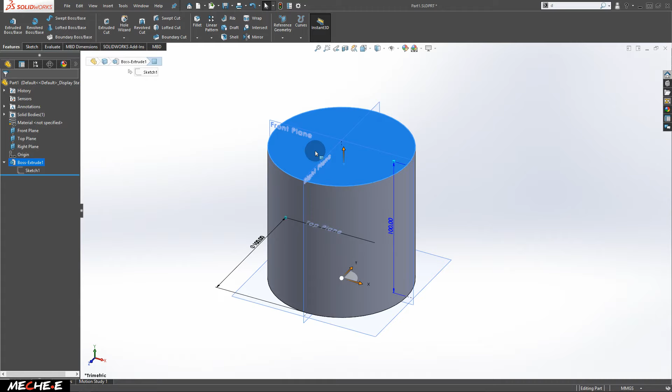To do that, right-click on the surface, select Normal To. Now with this surface selected, highlighted in blue color, head to the Sketch tab and select the Sketch button to enter the sketch mode, and you'll see a Sketch2 is created.

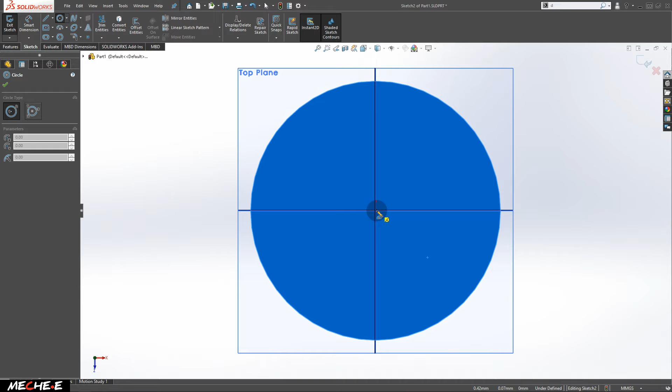Now draw another circle from the center point and give a dimension to it. Let's say 80.

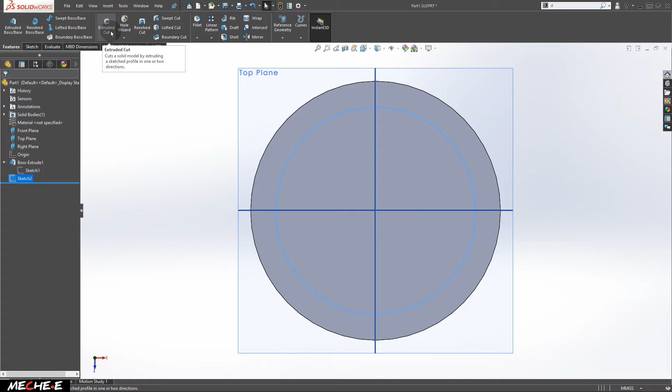After that, exit the sketch mode and go to Features. With the Sketch2 selected, press the Extruded Cut option right here. Now you can see there's a yellow line showing a preview of where it will cut through.

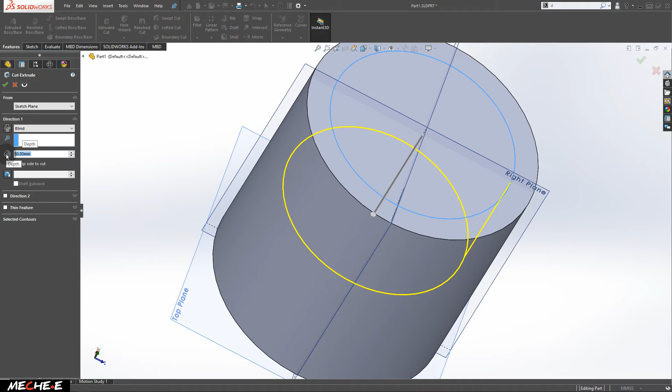To set the depth of the cut, you can key in a value here, or simply drag this arrow. When you're satisfied, press the tick sign. Now you can see this is cut into half, not all the way through.

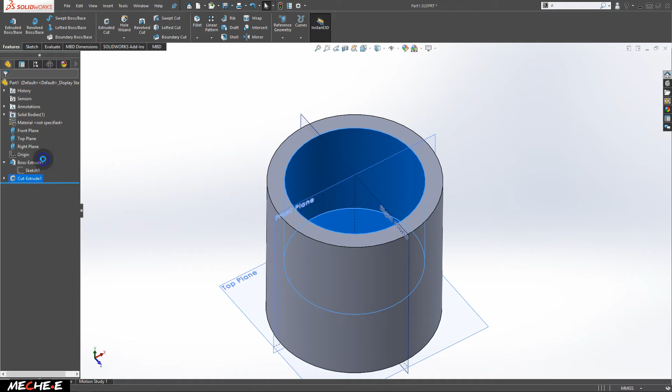To change that, go to Cut Extrude 1, right-click and edit feature. This time, let's make it longer. You can drag all the way through to cut through the cylinder, or you can change the options of Direction 1 to Through All, and click OK.

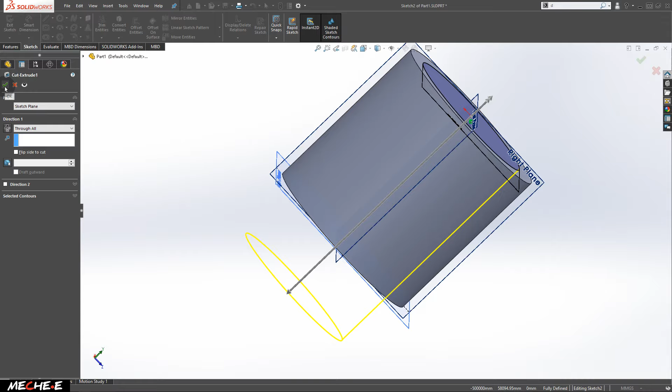Now you have a pipe with a hollow in the center of the cylinder. Another way of doing this is without creating another sketch on top of this cylinder.

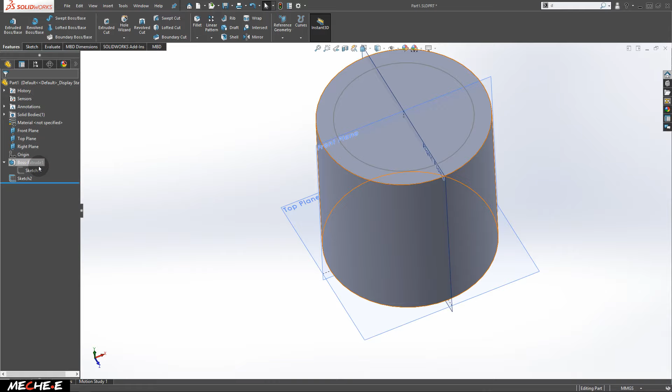You can do that by going back to the Boss Extrude 1 with the sketch previously created, where the original circle is. We don't need the Sketch2, so let's delete it.

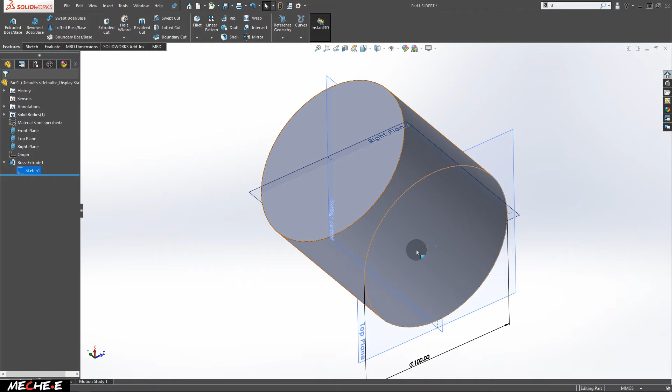Now going back to the step where you created the original cylinder, click this triangle button to drop down, and you will see Sketch 1. Enter Sketch 1 to edit the sketch.

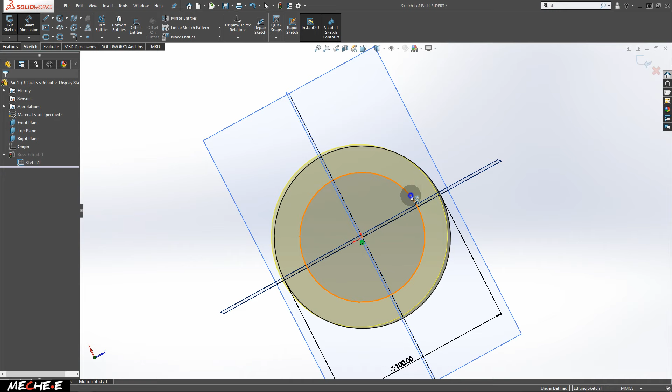Now in this sketch, you would like to first create another smaller circle inside the original circle, and then give it a dimension. Let's say 80.

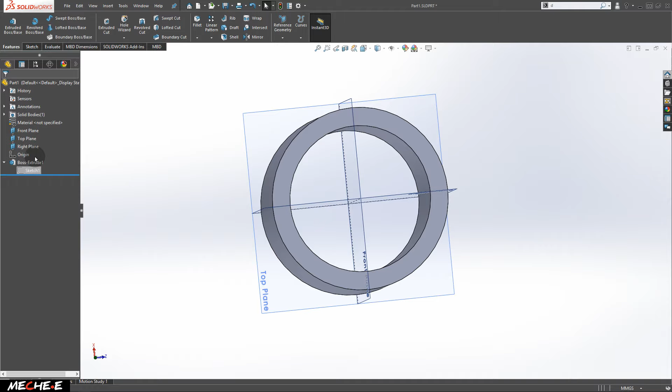Once the dimension is given, you'll see that now there are two circles in this sketch. After that, exit the sketch, and you realize that without the sketch tool, this has already formed a circle of hollows in the middle of the cylinder.

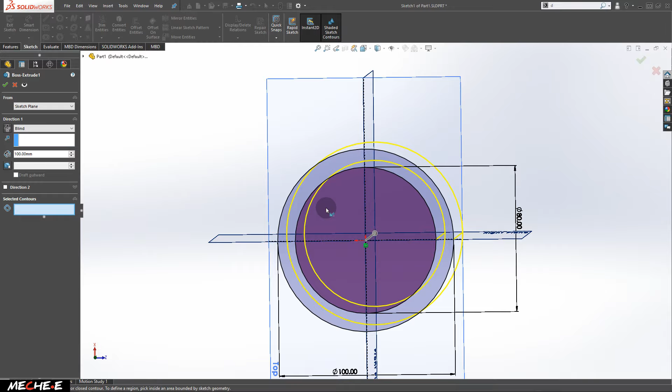The reason why: if you go back and edit the feature of the Boss Extrude, you will see that under the Selected Contours, you can select different areas to extrude. If you select just this area, you will get exactly the cylinder with a center hollow. If you select both regions, you will get a full cylinder.

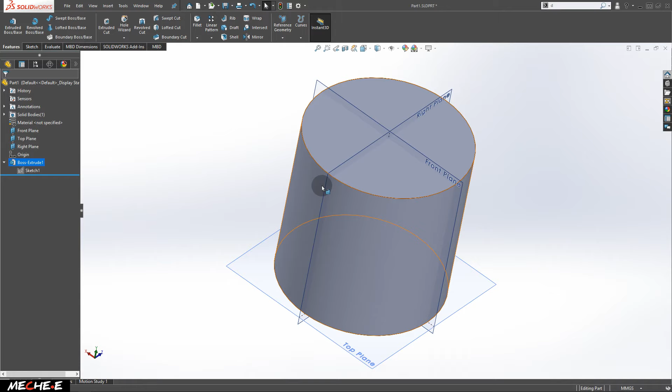Let's see, this is how you get a full cylinder. And if you want to just extrude the bigger circle, delete the selection of the inner circle and leave only the outer circle selected.

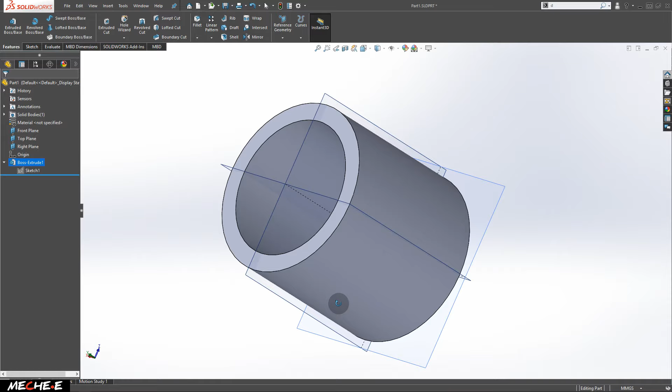After that, click OK, and you will see this is the same shape that you created previously using the Extruded Cut options.

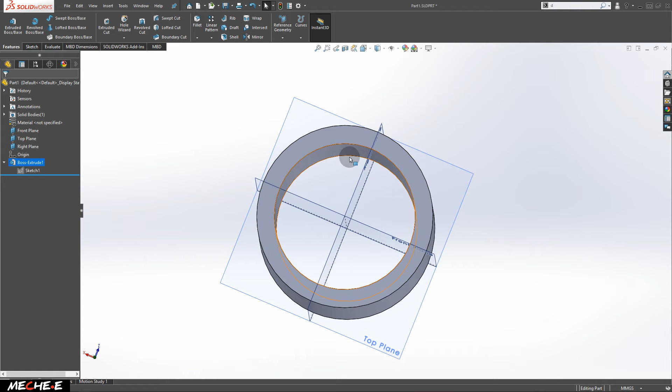This is all for the extruded cut explanation, showing how you can create a hole or cut a specific shape out of a 3D object. You can achieve the same thing by drawing the sketch into the original sketch and extruding with different regions selected.